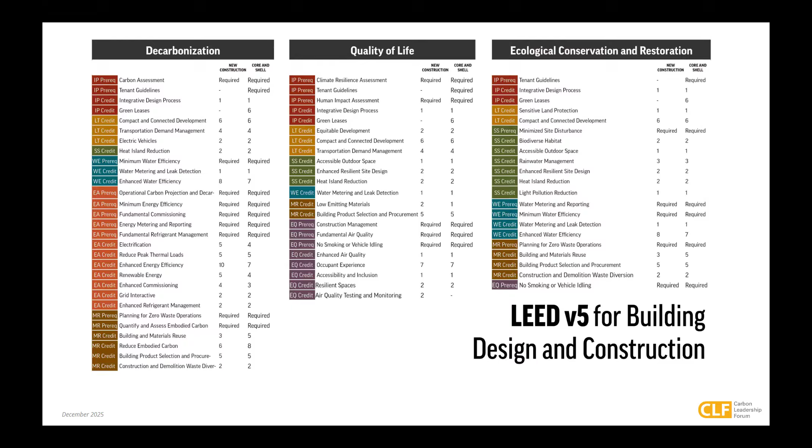So a couple of key highlights: LEEDv5 is really about building carbon literacy in our design communities, and we'll talk about the new prerequisite, which I'm sure you all know about, being carbon nerds like myself.

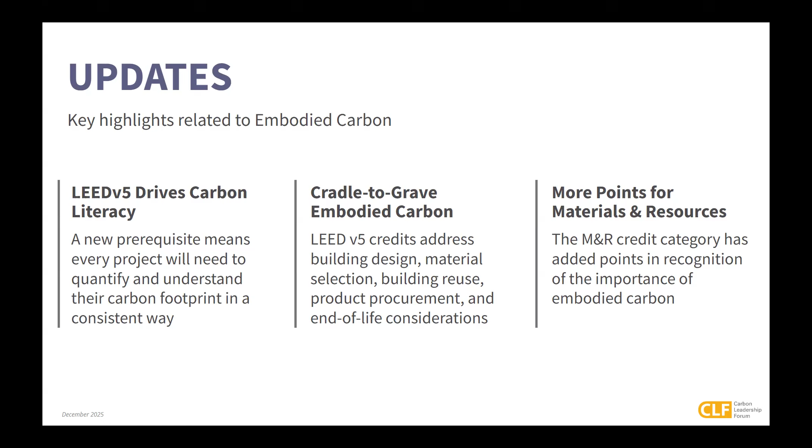One thing that's also super exciting for us on the MR tag and MR staff is that we did get more points for the materials and resources credits in V5. So we're seeing a lot more opportunity for transformation, things like reuse and embodied carbon. We're super thrilled to talk about that with you all today.

Before we dive into the credits themselves, a quick overview: the materials and resources credits are about supporting and promoting low embodied carbon, healthy materials, and circular economy across the whole product life cycle. This looks like targeting embodied carbon reductions for structure, enclosure, and hardscape, as well as promoting multi-attribute optimization across all building products. You'll see that in some awesome pilot credits we've just published and some coming out in Q1 2026.

One last thing before we get into the credits is that we have really worked to harmonize and align with the industry on all facets of materials and resources. In practice, this means the ECHO group that we have been a part of since the beginning—we have worked to align with the ECHO schema. So if you've looked at the ECHO schema, it will look super similar to the LEED reporting calculator, as well as things like aligning with the common materials framework for multi-attribute materials.

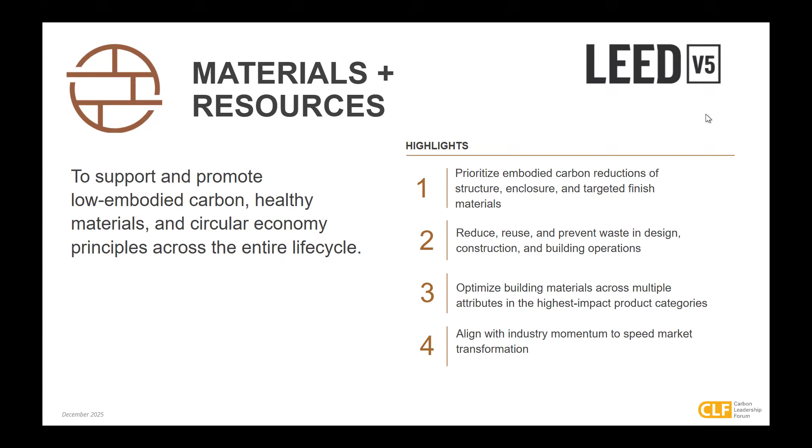With that, I have one more slide here. This is our scorecard for materials and resources. I just want to point out that while we have credits directly targeted at embodied carbon and embodied carbon reductions, that thread really pulls all the way through the credit category. We see direct embodied carbon impacts highlighted in yellow, and indirect embodied carbon impacts in blue. So what you really see is embodied carbon is all over the place—getting quantified, reduced, highlighted, and rewarded in many different ways.

With that, I'm going to hand it off to dive into the credits themselves.

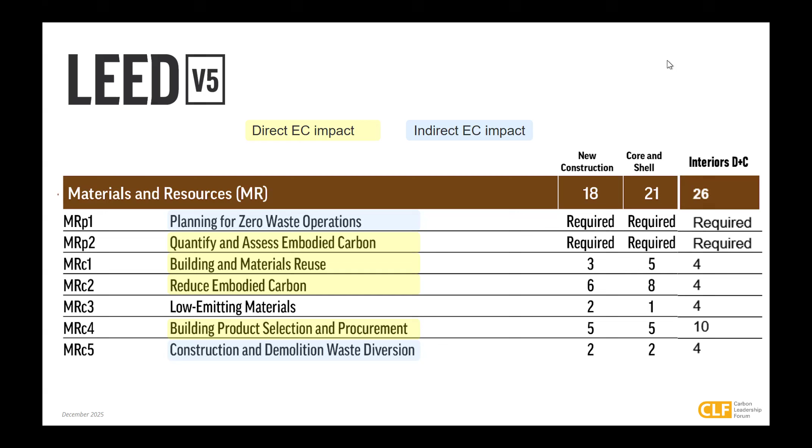All right, let's dive into the prerequisite. As she mentioned, from the outset one of the driving forces for LEED v5 was to double down on embodied carbon. There was very much a desire to get further faster and really encourage all project teams to engage in embodied carbon quantification and reduction. That's ultimately the impetus for this prerequisite. It's the first time in LEED that all projects will be required to do this. And ultimately the goal, as Lindsay mentioned, is to build carbon literacy across the entire AEC industry.

The prerequisite mandates that projects analyze the embodied carbon impacts of key material categories, including structure, enclosure, and hardscape, focusing on life cycle stages A1 to A3. The materials covered include asphalt, concrete, structural masonry, steel, insulation, aluminum, wood composites, cladding, and glass. Projects must identify the top 3 sources of embodied carbon and then describe strategies considered to reduce these hotspots.

This is a really big and major shift towards early stage carbon awareness in design, bringing it to the forefront on all of our projects. It's also a major shift to integrating LCA thinking from concept through design and construction.

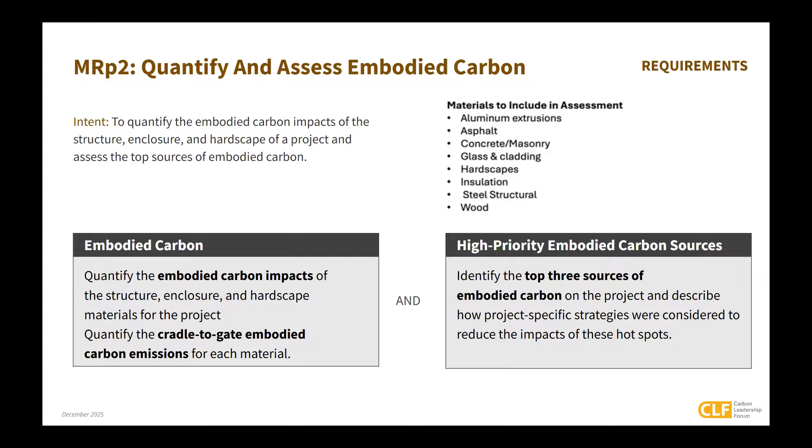I'm going to dive into the Reduce Embodied Carbon credit. This is the largest credit in terms of points, and it also has 3 different options for pursuing embodied carbon reductions. As Kelly just explained, the prerequisite already includes an assessment, so this is where you go beyond that, especially for options 1 and 2, to get reductions.

The first option is whole building LCA. You'll need to conduct a cradle-to-grave, or A through C, assessment of the project's structure, enclosure, and hardscape at a minimum, and then compare those results to a baseline developed for the project. I'll show what that reporting looks like, because I think some of that language sounds familiar, other than hardscape, but it's really exciting to see the update and what the reporting will look like for V5.

This is a pathway where you can get the most points and also use the broadest range of strategies to reduce embodied carbon. Also, a change is that in LEED v5, you need to report 6 environmental impact categories, but only make reductions for global warming potential.

Second, there's the EPD analysis option. There are 2 paths within this option. The way I think of these in shorthand is that path 1 is the EC3 pilot credit approach, and path 2 is the buy clean approach. To explain more, in the first path you're again collecting your bill of materials quantities for structure, enclosure, and hardscape materials. This time you're using data from EPDs, focusing on A1 through A3.

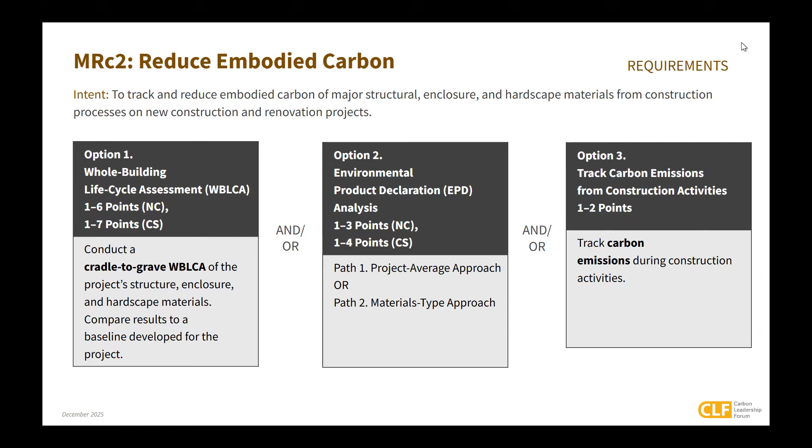For the buy clean approach, where you have to collect actual product EPDs for all of the materials in that category—that's a big data collection challenge—the points here are rewarded based on the number of material categories where you're demonstrating that you're better than industry average.

I'm going to show a few screenshots of the Reduce Embodied Carbon calculator that's available online, because I think it helps visualize some of what this will look like. This one is for option 1, whole building LCA.

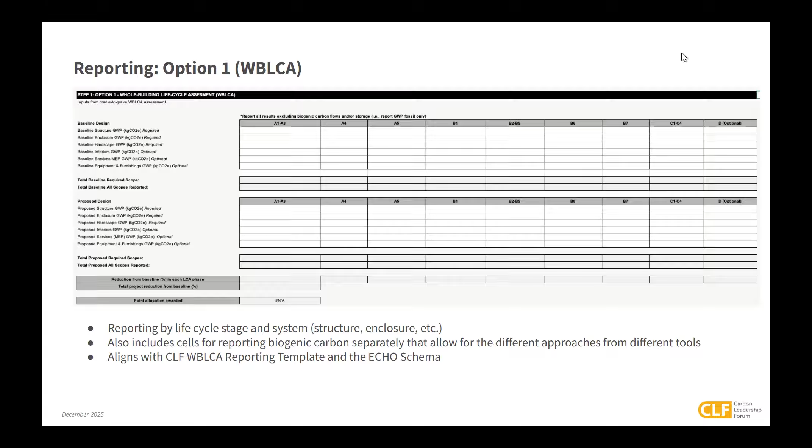It will now be reporting by life cycle stage and system. The structure, enclosure, and hardscape—those first 3 rows for the baseline and the proposed—are required. But you also see interiors, services, and equipment and furnishings have rows if those are reported, which is great in terms of transparency. Below this there are also cells for reporting biogenic carbon separately, with different approaches for doing that since it's not done consistently across tools. Very exciting, as Lindsay already mentioned, this reporting aligns with the CLF whole building LCA reporting template and the ECHO schema.

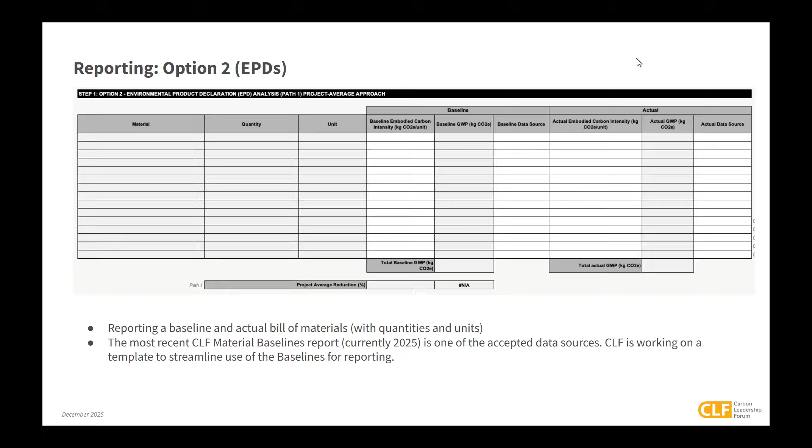So recapping, drawing back on the multi-attribute materials and traits we want to see across all of our products, is the Building Product Selection and Procurement Credit, formerly known as BPDO. The acronym is now BPSP. This credit is about seeking out multi-attribute products that go beyond single attribute, asking manufacturers for products that consider and have documentation for things like climate health, human health, ecosystem health, social health and equity, and circular economy.

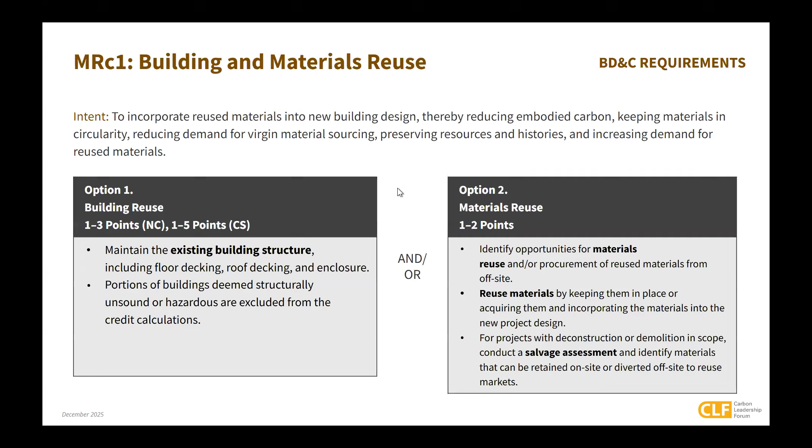Okay, so with this we're going to move into some panel questions. Feel free to start populating them in the chat, but we're going to start with the ones we have set up. So to start off, what is the change you are all most excited to see in V5 from the standpoint of embodied carbon? Kelly, you want to kick us off?

I'd be happy to. I am absolutely most excited about whole building life cycle assessment clearly being identified as the gold standard for carbon assessment and reduction. It's been allocated more points than the other pathways, and I think this encourages teams to at least try that pathway. What's great is that you can pursue multiple pathways at the same time. This is what I've been telling people when they ask for my tips and hints for LEED v5 - try all the pathways from the outset, try them all. I'm very happy that LCA is being rewarded the most points, because you're really just missing the boat if you're not attempting a whole building life cycle assessment. We really fought hard for whole building life cycle assessment to be prioritized, and I'm really glad that's how it landed.

Well, I think I just kind of said it - reuse is my favorite thing to happen. It's almost like watching your kid grow up. I'm really excited to see what's going to happen in the next 5 years with reuse. Will this change the market? Will there be uptake? Will there be more reused materials? I'm hoping it's a value option, and then you'll also get LEED points for it. So I'm excited to see what happens.

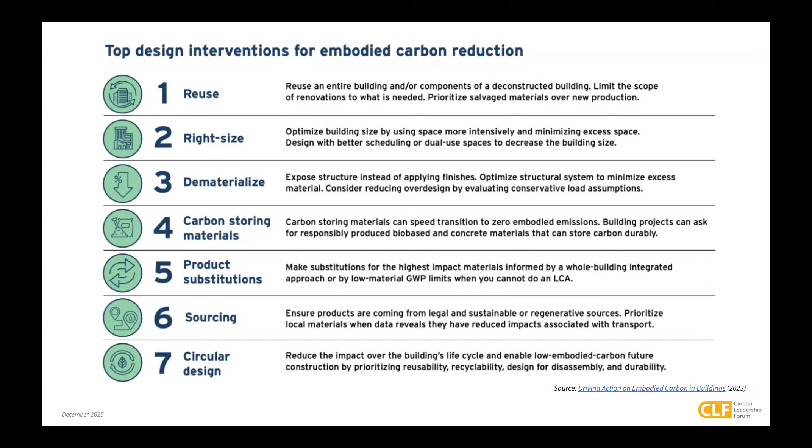And in terms of product selection and procurement, or if you're just focusing on EPD analysis, there's also a suite of tools like EC3, Material Compass, and ECOPortal. I'd love to hear from firms like Kristen and others what tools you're using.

Yeah, in general it is changing, but right now we're treating it similarly to how we treated the AIA 2030 commitment, where we go into the zero tool early on and figure out our baseline and then what our target should be. So we're using C-scale to do that for both operational and embodied carbon. Then as the design gets refined we're using Tally in our office, which relies on Revit. Once our model gets built out, we start looking at different scenarios there. So we're able to sort of straddle - we can do some testing with c.scale.

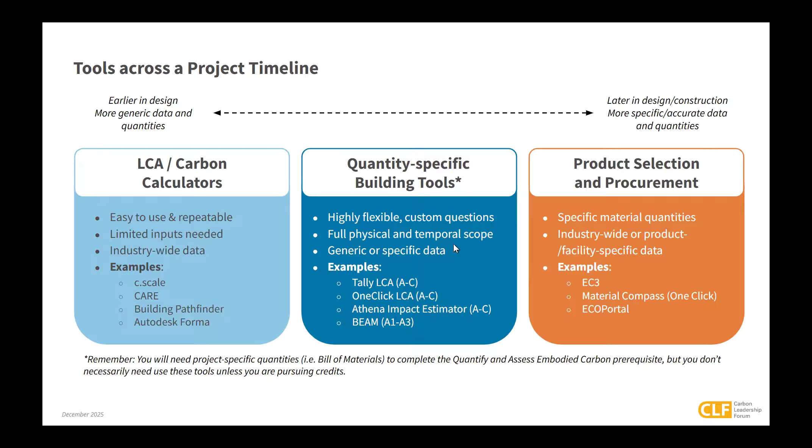Lindsay, I think we actually knew this was going to come up, so we have a list of some guidance there. This is officially in the reference guide: resources for defining the reference building, the ASCE resource, and then some of the Canadian resources, the national guidelines, which build very heavily off of the Vancouver Embodied Carbon guidelines.

But I'd say there isn't a big update in terms of information for V5 about how this is defined differently, and I know it's something USGBC and CLF are both interested in working on. So part of my question is to turn it back to the group. We actually have a survey we're looking to share with CLF hubs and others in our network for a few different projects coming up this year. One we're interested in is working with practitioners on defining best practices or development guidelines for the reference building. I'm going to put that survey in the chat, so if it's something you're really passionate about, I'd encourage you to join us in defining some of those best practices. There are two other ones, whole building LCA related, you'll see there as well.

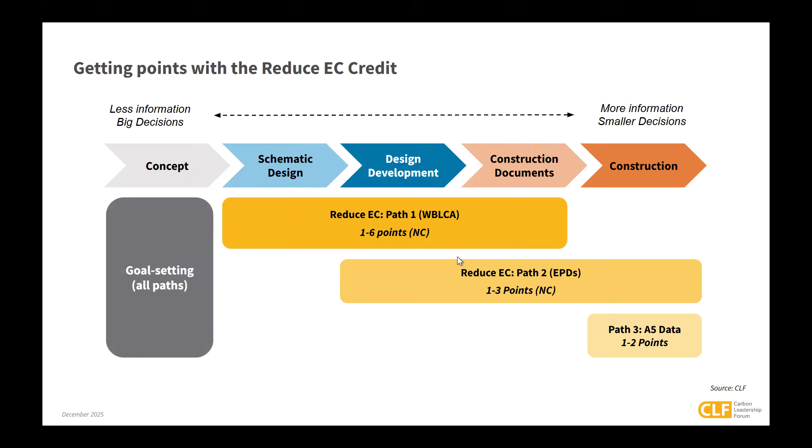All right, I don't see any other panelists raising hands, so I'm going to shift to another question. Dalton is asking about the possibility of double counting EPDs for path 1 and path 2. So I'm just going to pull up the credit itself. This is an 'or,' not an 'and/or,' for option 2, path 1 and 2.

Yeah, and I'm realizing, Lindsay, there's some fine print under this credit table. You can't get more than one of the pathways for just meeting baseline or industry average. So if you demonstrate through a whole building LCA that your building is better than baseline, you can't also get points for using EPD analysis to say you're better than industry average.

Okay, hopefully that clarifies that, Dalton. Lindsay, Kelly, and others, I know we've talked about this. I think the reason you can get points from multiple options, even with some overlap in reductions, is that there's really the idea of encouraging you to start from the beginning, thinking about embodied carbon reductions in design, and then continue picking up points as you move into procurement. So could you get all those points just from whole building LCA for procurement reductions and for design? Yes, you can demonstrate it that way.

But this also provides a different approach where you could get some reductions from a whole building LCA and also some additional points using EPDs to show some of the more procurement-focused reductions you got. I don't know, Kelly, do you want to add anything? Yeah, you've got it exactly right. You can get points from option 1 and option 2, as long as you're not double counting the points for just meeting industry average.

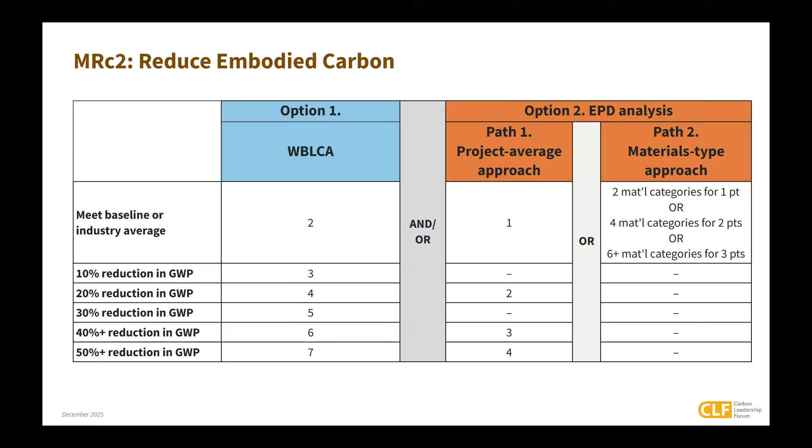So reuse is also an area where you can get multiple points. This is an example of a case study, a project we did. It's completed and already certified LEED version 4. 92% of the existing structure was reused. If you go to the next slide, that achieved 6 points total in version 4.1, with just the option 1 building materials reuse pathway.

And then for version 5, if we were to do that - we didn't do a whole building LCA, so we're guessing based on history - we're looking at 4 to 6 points for that embodied carbon reduction, plus the 5 points for building reuse. So you're bumping up to a range of 9 to 11 points. We're really trying to incentivize projects like this, where you're using what you can, what makes sense, and reimagining the building.

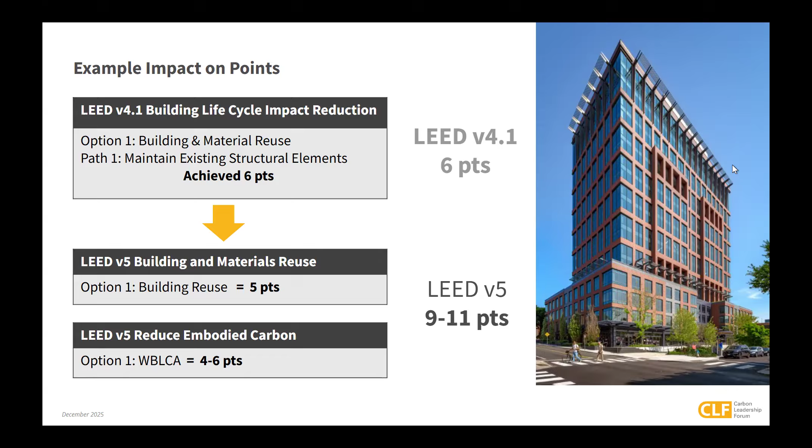Oh, and I forgot to tell you about the project - it's a courthouse. If you go back one slide, I've talked about this so much I forget. It was a courthouse and jail, and you can see that podium level was basically impenetrable, surrounded by neighborhood. Context is in Cambridge, Massachusetts, and it was converted to 3 stories.

The podium is now affordable housing units with office space above. The facade just didn't work, so we had to replace the envelope, and we took 2 floors off the top, but carved out some niches and reused everything we could. So we want to see more of that.

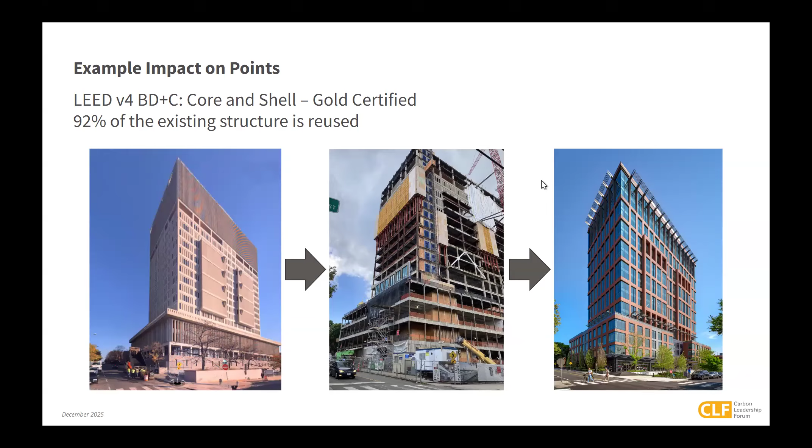Yeah, Kelly, do you want to really drive this point home with your reuse project? Yeah, sure. I think this also goes to double dipping because this project is essentially double dipping in gaining embodied carbon reductions from reusing steel, in addition to where it will be rewarded in LEED v5 with use of reused steel. So hopefully all projects like this one can be rewarded in LEED v5.

But this is the Thomas A. Fanning Student Athlete Performance Center at Georgia Tech here in Atlanta. It's a new 100,000 square foot facility on Georgia Tech's campus in the northeast corner of Bobby Dodd. The construction required several bays of framing of the existing stadium to be demolished to make way for the new facility. During design, while on site, our engineers from Walter P. Moore saw that some of this steel could be reused in the new building, and thought it would be the perfect opportunity to introduce material circularity to the project.

So they suggested to the team that steel be deconstructed and salvaged for reuse for the new building. Of course, it was vital that there was buy-in from the entire project team, which included SLAM, DPR, the steel fabricator Steel LLC, and Green Circle Demolition. Everybody worked together to make sure this reuse could happen.

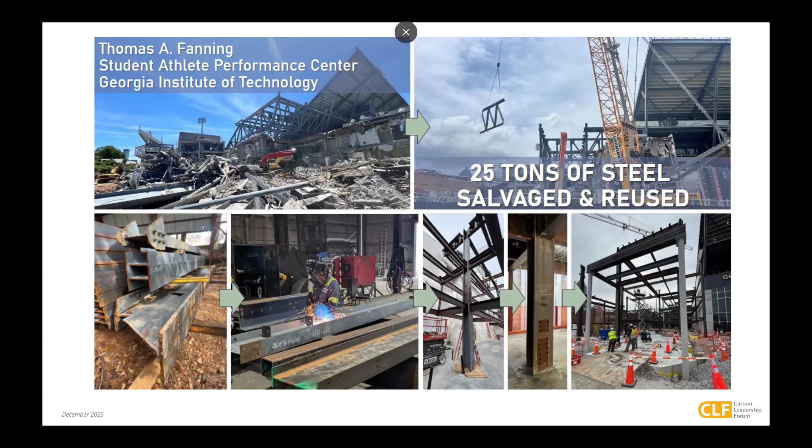Alrighty, so I see a couple of questions in the chat about this, so I'm just going to address it. Multifaceted, but where in the BPSP credit does embodied carbon come in? You are going to see that show up in the climate health section. I know this is really small print, but if you scan that QR code, it's going to take you right to that document that speaks about building product selection and procurement.

It has this beautiful matrix, which is now many pages from the programs we have evaluated and added, with the TAG's hard work and commitment, as well as staff. And I will add that embodied carbon is going to show up in EPDs, in climate health, and again, you can read more at the QR code there. But one thing I want to highlight is EPDs getting points is going to vary based on the optimization. We are not accepting product LCAs any longer. Industry-wide EPDs are also not gaining points in LEEDv5, and that is because we think it's time to take the next step and optimize our EPDs and just do better with our materials.

So Helen, to answer your question, if you look in that document linked here, you will find a lot of different documentation and outlines for required products,

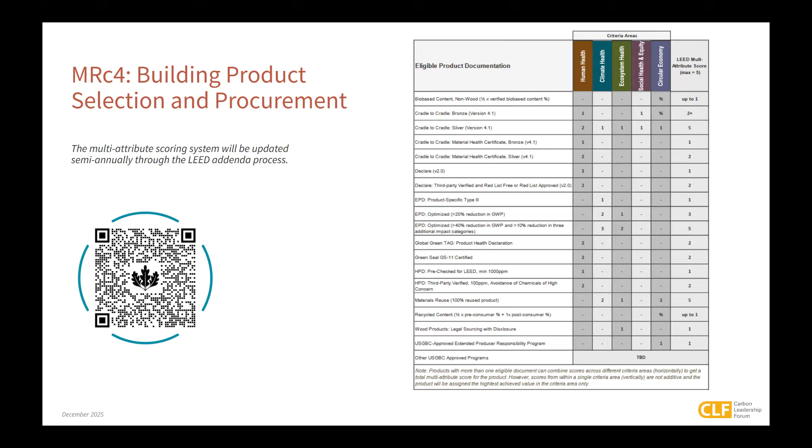But we've actually looked at this when talking with different jurisdictions. If you look across projects, you're gonna be asking some teams to make massive reductions, and a huge number of projects aren't going to have to do anything, which I would say is not the spirit of LEED. They're rewarding points for folks actually making reductions. So I would see an either/or or a both/and sooner than I'd see benchmarks only, is my guess.

I'm really in favor of the both-and, setting the benchmark but also requiring a percent reduction, just because all buildings are different. All of you in the AEC industry know this—we have to design every single building individually. The foundation conditions are different, the geotech is different, the wind, the seismic. I'm a structural engineer, so every building is unique because of its situation. I think it makes sense to benchmark certain building types but also require the percent reduction.

So you can have the project specific discussions. That's really what this is all about, right? It's about having those project specific discussions that make people uncomfortable, get out of their comfort zone, do new things—explore new materials, try new design strategies, all the things. If you're not having those conversations, then you're kind of missing the point. This is not supposed to be just an accounting exercise.